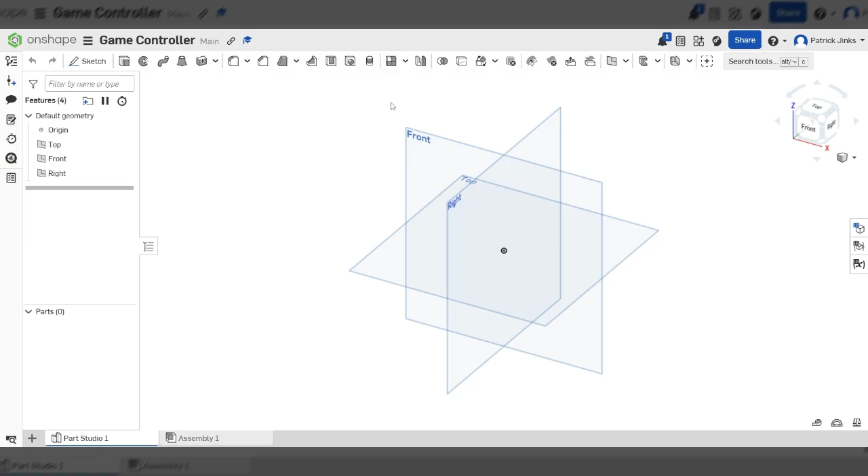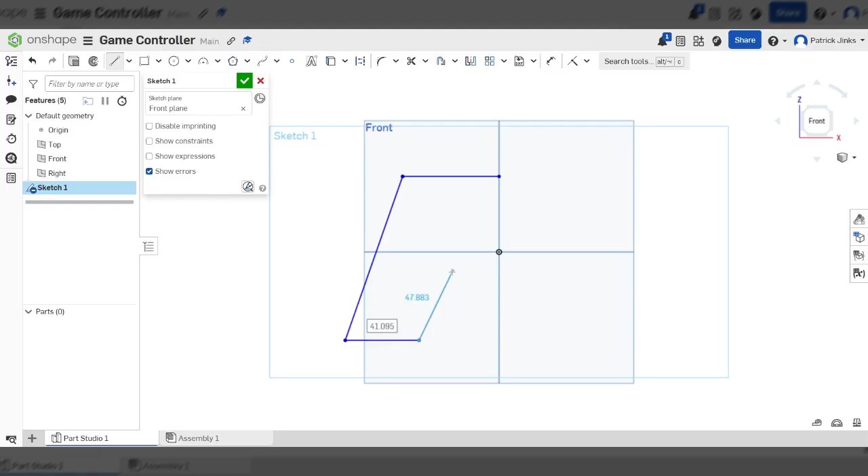First of all, I'm going to start a sketch on the front plane, and I'm going to draw half of my controller. You're probably going to want to spend a bit more time than me on doing this, but what I'm going to do is draw what I think is going to be a basic shape for my controller.

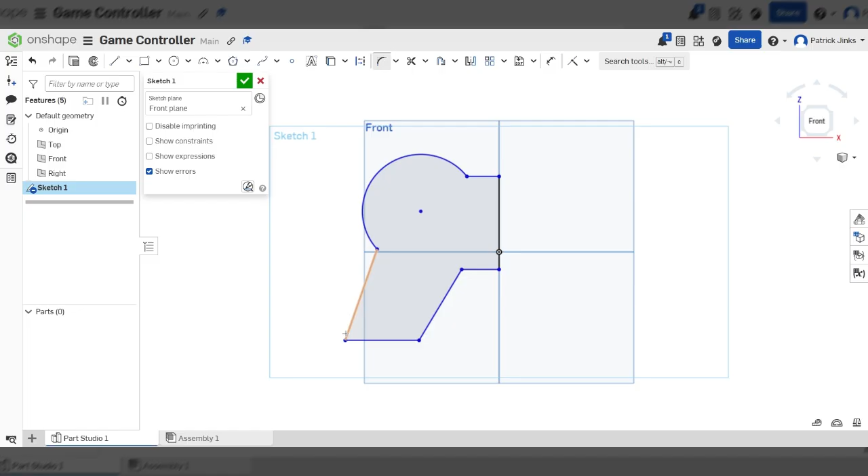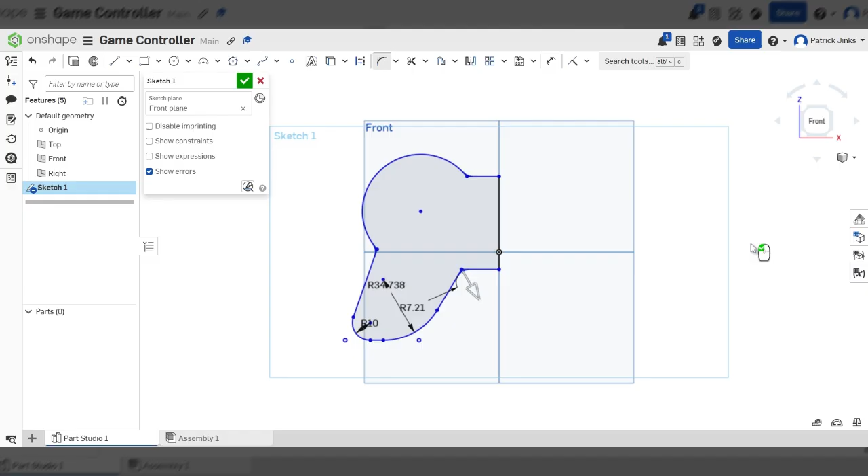I might put a slight round on there and trim the excess off, and then I'm going to fillet up each of these corners so it's all nice and round.

Then what I'm going to do is mirror this sketch. I'm going to click on my mirror tool here, click on my mirror line - there is a more in-depth video for sketching mirrors in the Onshape tutorial series. All I'm going to do now is click and drag around my shape, and I'm generally quite happy with that. I'm just going to trim that mirror line out. Yeah, I think that's all right.

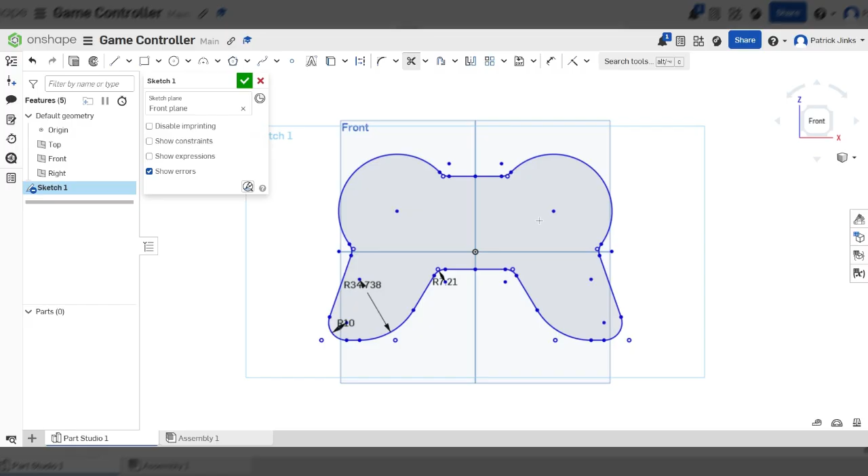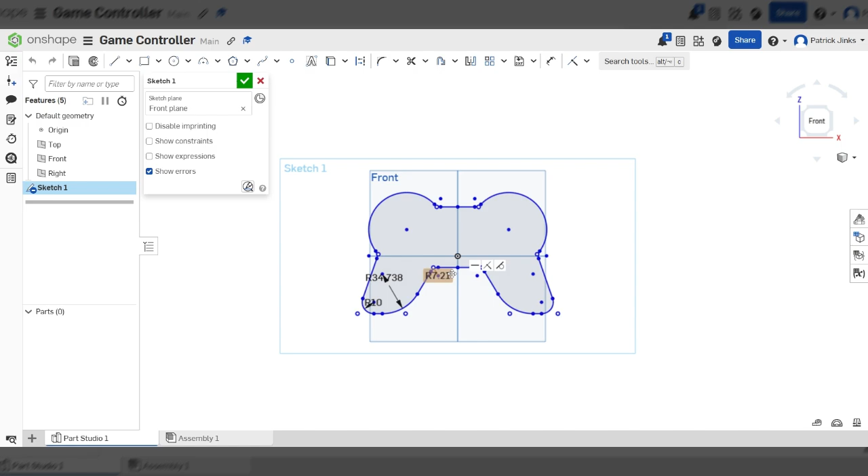What I'm going to do now is press extrude. If you're having trouble with the extrude, what you've done is not quite closed your shape. Like you can see with mine, these lines went all the way up to the mirror line. If you've got a gap, or if it's not quite a fully closed shape, if it's not grayed out, all you need to do is go around, zoom in, find the gap where you've not got a line connected, and then just use the line tool to join it up.

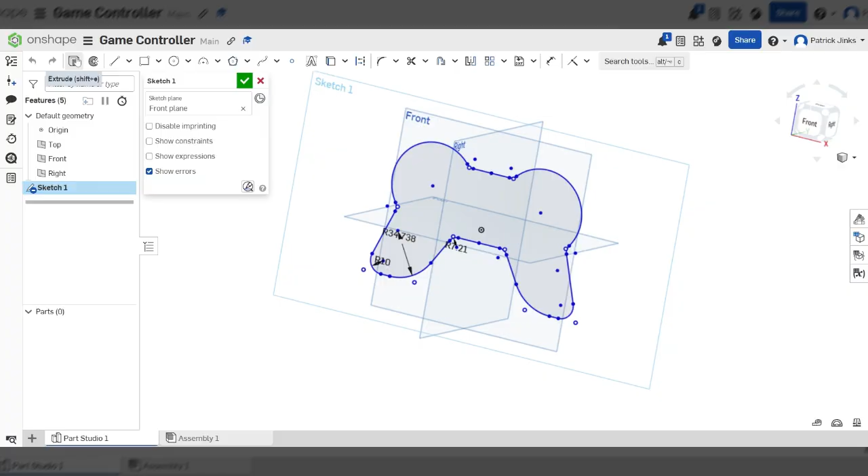Pause the video at any point if you're not following along or you're spending more time on this than me. But next, when you've got a shape you're happy with, I'm going to press extrude, and I'm going to extrude it symmetrically. I'm going to turn that on - actually, I'm not going to turn symmetric on. I think it'll be easier for me if I leave that.

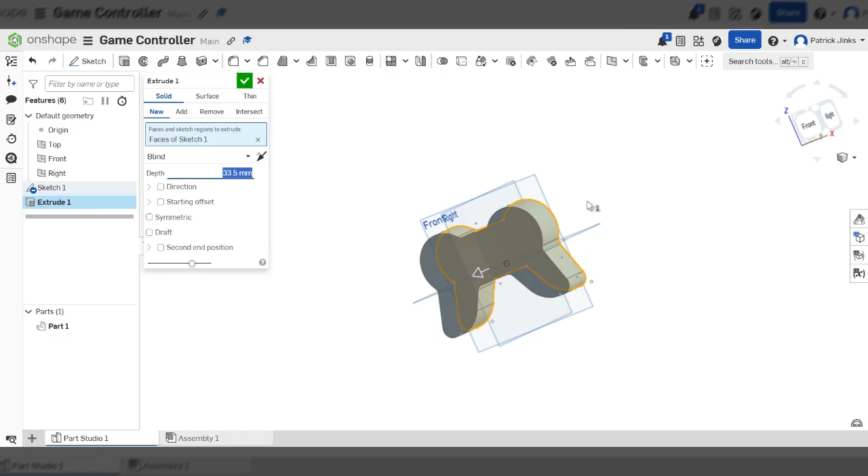And I'm going to make it a bit bigger than what I think is sensible - that's probably a sensible size once I've filleted all my edges, so that's about 33. I'm going to make mine 40, because we're going to be doing a bit of cutting away of this. So what I've got now is, well, technically a prism - I've made a 2D shape and just pulled it out, extruded it to be a 3D shape.

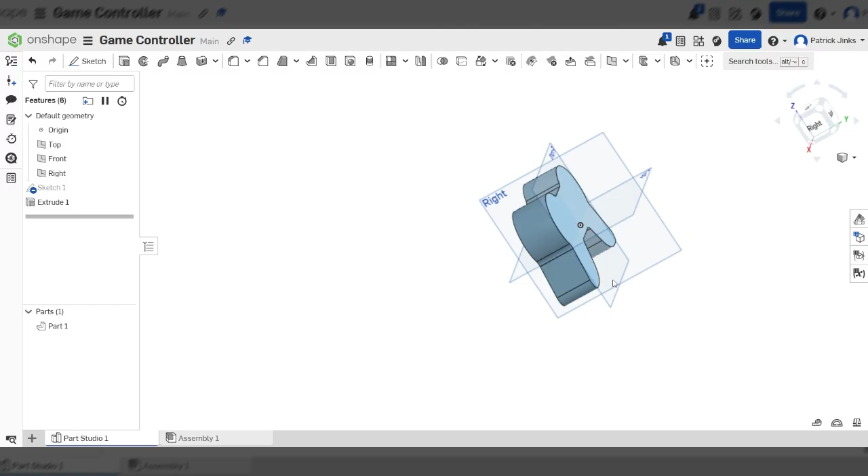Now what you're going to do is look at the right plane. Click on the right plane, press N, and now we're going to cut some of this profile away into what I like to describe as a sort of comma-like shape, so you've got that curvature, that curved profile on the front and back.

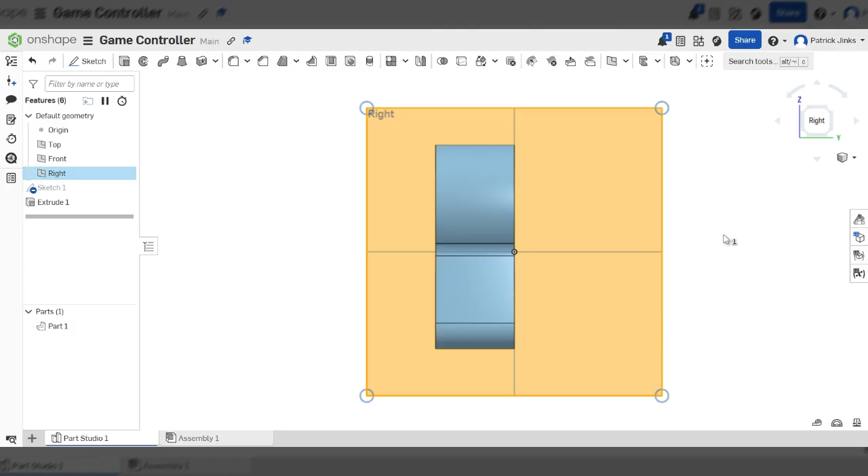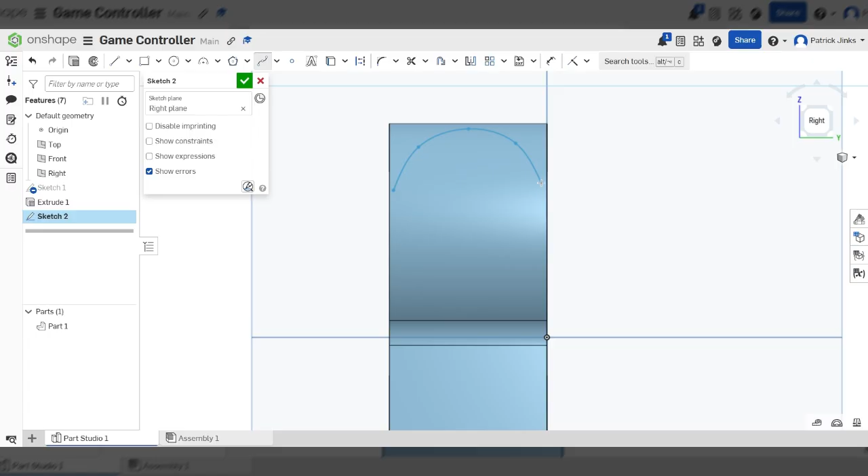So I'm going to do a sketch on my right plane, and use the spline tool. I'm probably going to want it nice and broad at the front, and I want to keep all my lines inside the shape - I don't want any to go out because that's going to look a bit weird when we finish this off. I'm just going to click round, being super careful, come in a little bit, and make this corner a little bit tighter than I did my top corner.

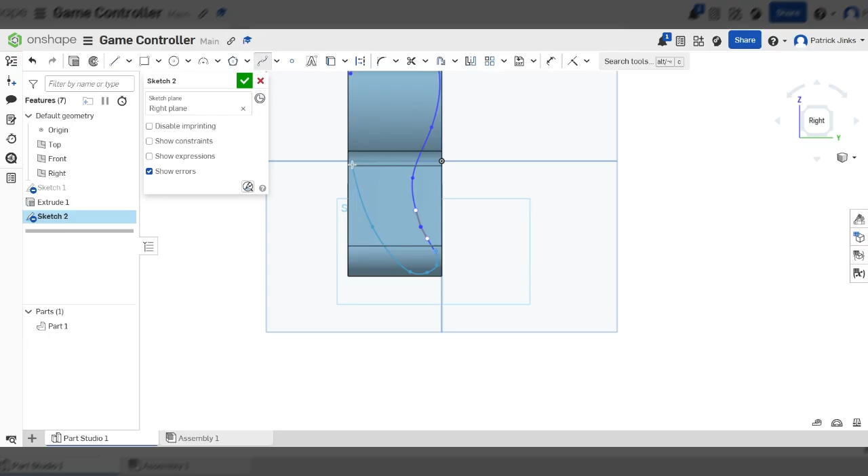You're going to do what you think's right, what you think looks right. Yeah, I'm kind of happy with that. What I've done is, oh, I've gone a bit rogue over here, so I'm just going to use my trim tool and go into it. Oh dear, that's not liked it, has it? I'm just going to try and fix that best I can.

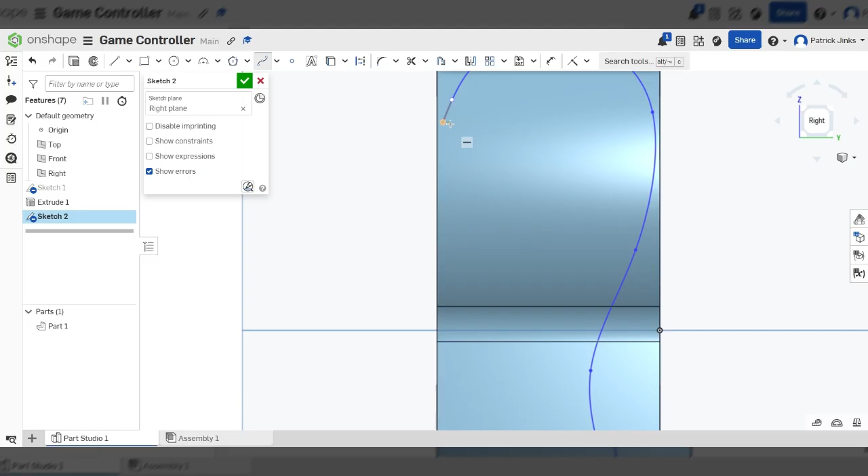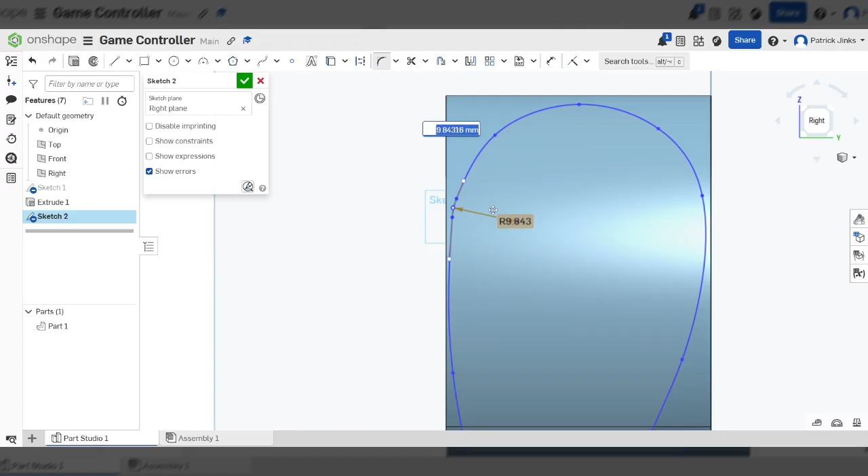In a moment, what I can even do is fillet off some of these rough edges. So where I've just become disconnected, this might happen, where I've got that corner not quite flowing. I can put a fillet in there just to make sure that's nice and neat. And over here, no one's going to notice that, but we'll do it for the sake of benefit anyway.

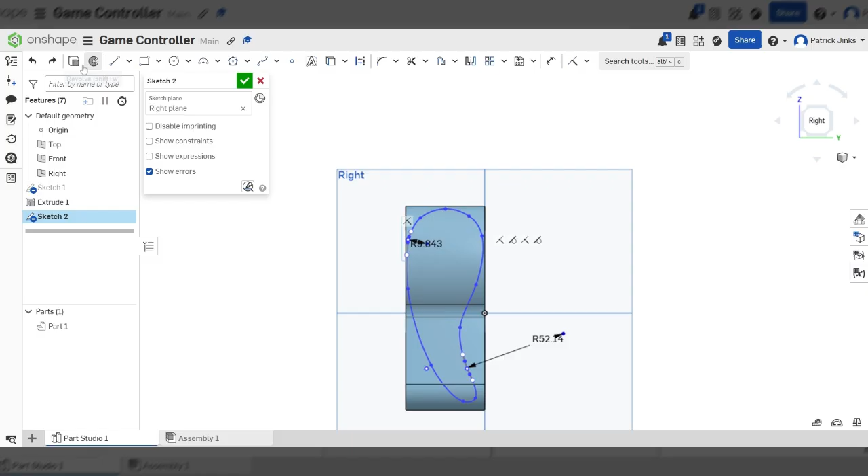Now we're going to do an extrude. The issue I've got, however, is let's turn that to 30. Oh dear, no we won't. The issue I've got is that if I try and extrude that, it's going to extrude everything in this line, and I am going to extrude it symmetrically, and I am going to remove it. It's cut out the wrong bit. It's left all the outside and left the inside.

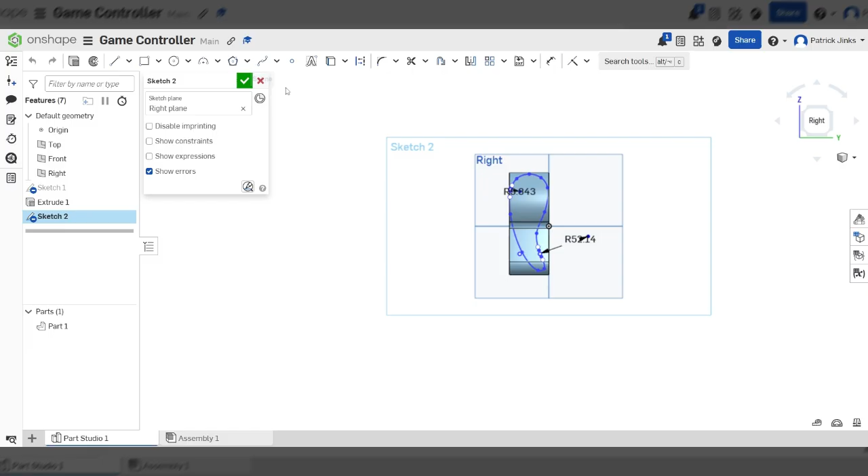So what I actually need to do is go back into the sketch. It's dead easy - all I need to do is draw a box all around the outside. There you go. And now what's actually selected is all the inside of this box has gone grey. Everything in the middle of the shape has been left a bit like a square donut with a weird hole in the middle. But we've got the outside selected. That's why we need to draw a bigger shape around the outside so we can select all this.

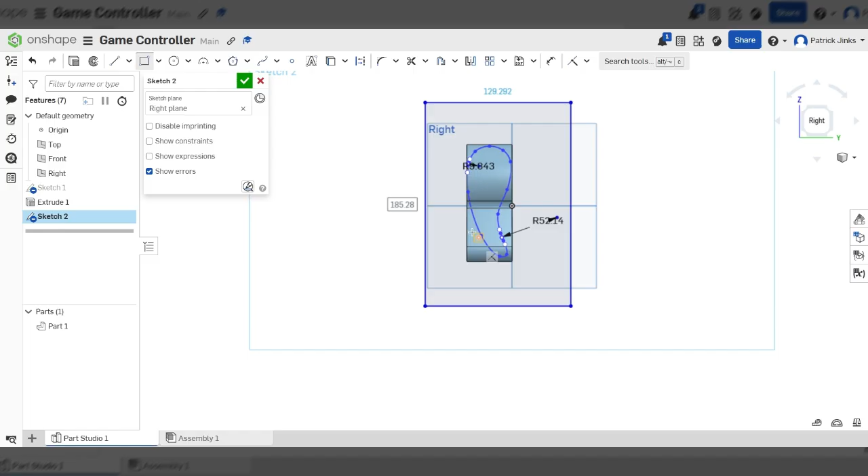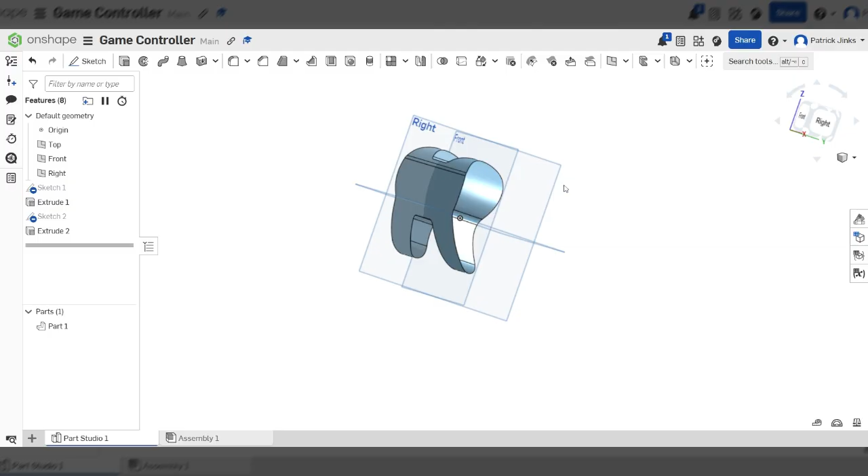And then I should be able to click extrude. And as you can see, it is the right bit that's extruding now. I'm going to click remove. I'm going to click symmetric, so it pulls out both ways. I'm going to click my tick. And now I've got a nice little profile for my shape of my controller.

The only thing I need to do now is go on the top plane and draw half a sketch. So let's have a look - again, only going to start here. And I'm probably going to use my arc tool.

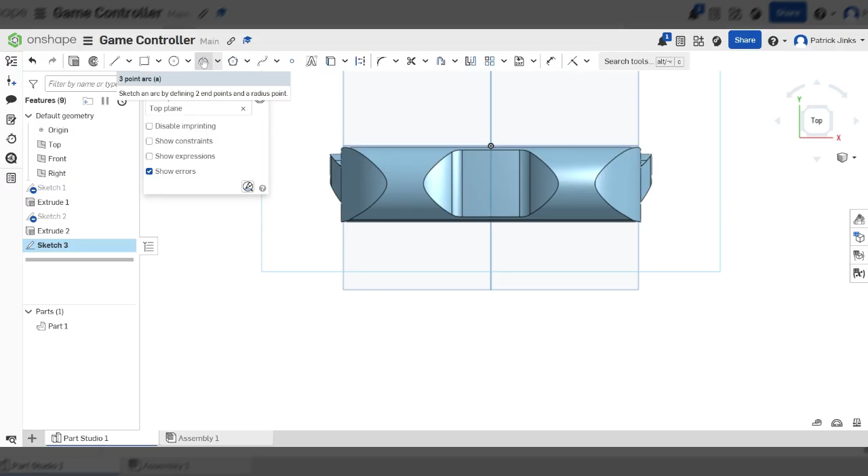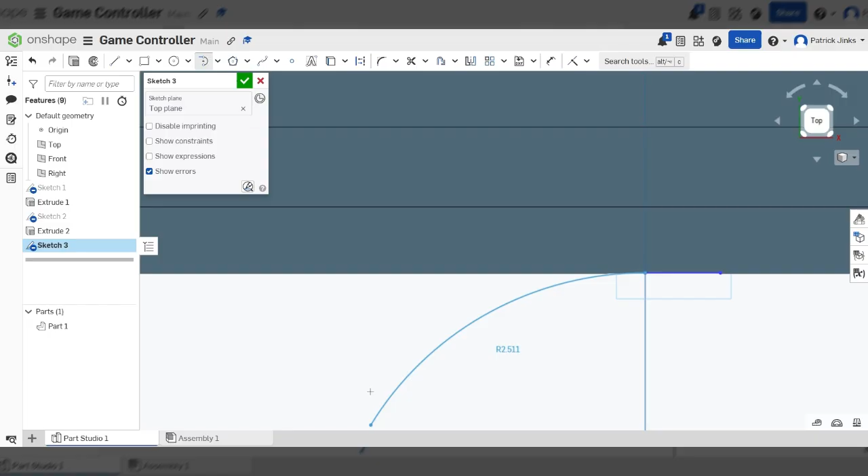In fact, if you want to do this the proper way, what you're going to do is right on the edge here - zoom in as far to the edge as you can go. You're going to draw just a straight line and then press escape. What we can do now is in the arc drop down, which defaults to 3-point arc, you've got something called tangent arc. And what that does is if you click at the end of a line, this arc is going to begin being a continuation of that line and it's going to flex.

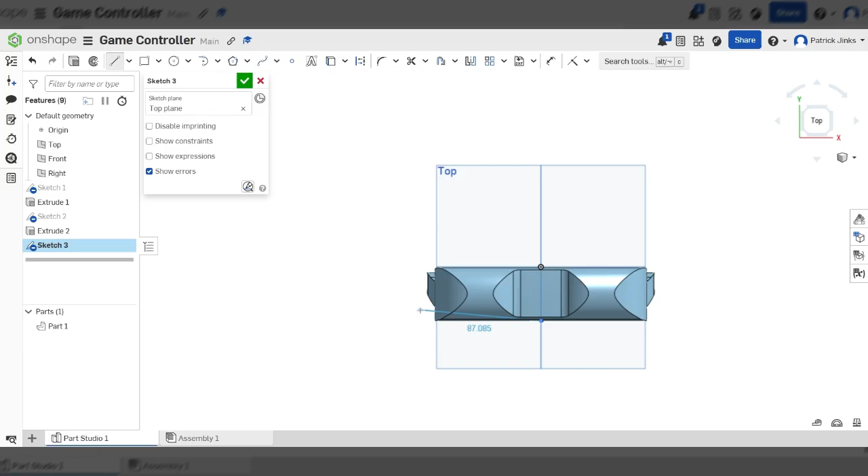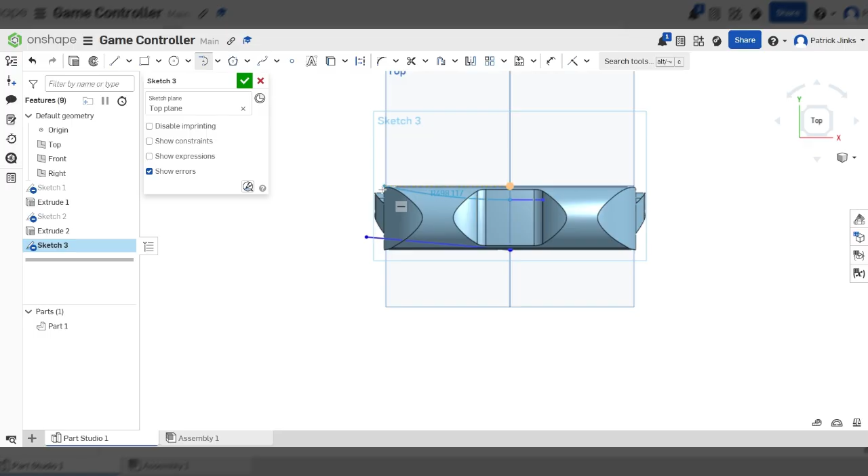This is really important because when we mirror this, we want it to be absolutely horizontal so we don't get any unwanted creases in our design. So I'm going to do quite a gentle curve on the front, and a bit of a steeper curve on the back. I'm going to draw it into about there, I reckon. I'm going to draw my horizontal line out, click my tangent arc, and it's going a little bit steeper. And then it doesn't matter how, but you're going to join these two lines up.

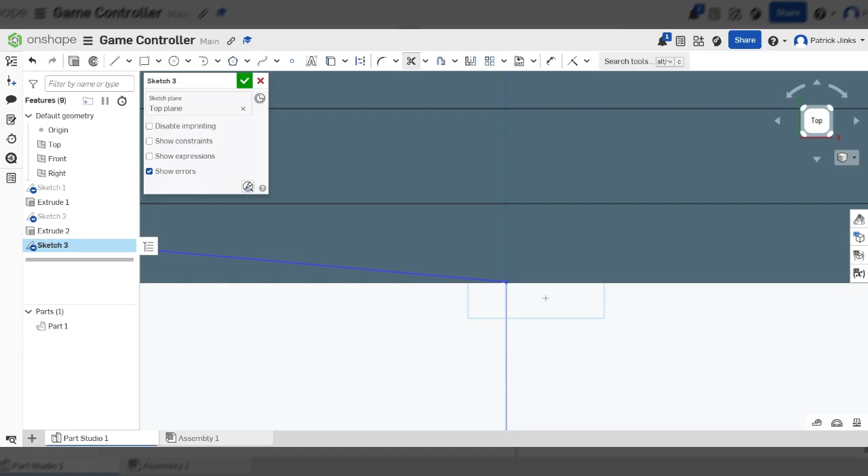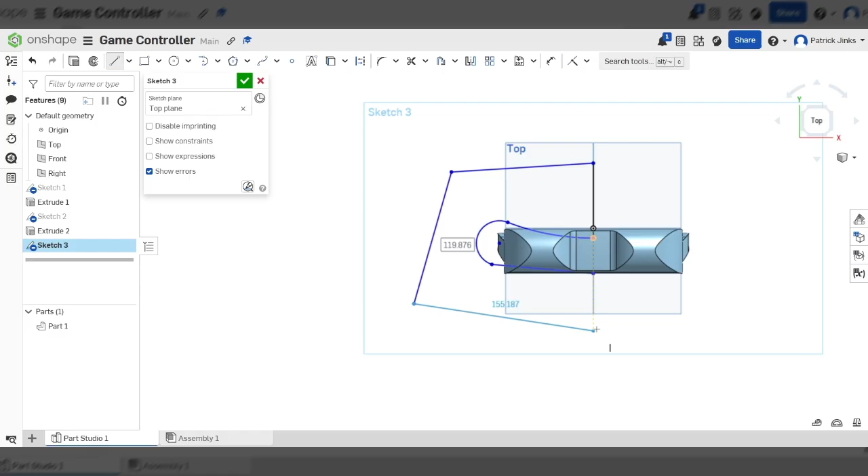Trim these two initial lines that we started with, or you might need to zoom all the way in. And then you're going to close the shape off by drawing a vertical line to there. Last thing - actually, you're not going to draw that vertical line there. What you're going to do instead is draw a line straight up and bring it round, just so we've got highlighted again everything that's not in our design, everything we want to get rid of, which is just actually this section here and this section here.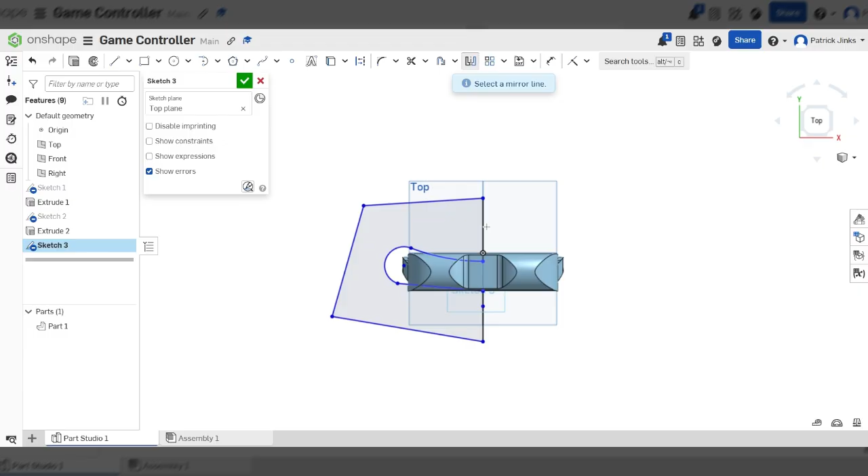What I'm going to do once I've done that to one side, because I do want it perfect and symmetrical, is I'm going to mirror it. So mirror tool, select my mirror line, which should be the front plane, or is it the right plane - highlight everything. I don't think it matters, but I'm just going to trim these off so I've got one solid shape here, and I'm going to remove that symmetrically so it goes up and down.

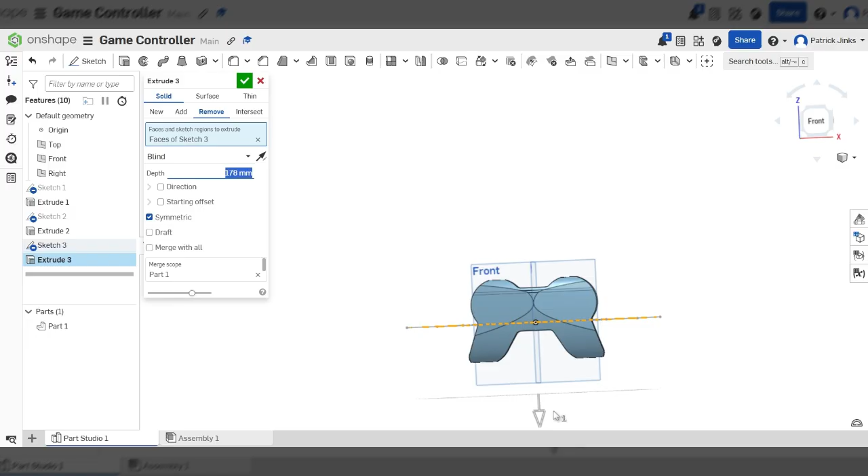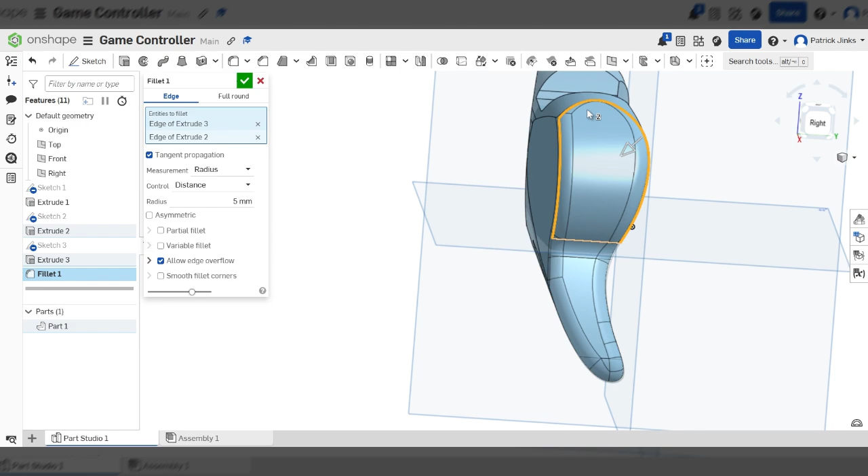Now I've got the basis of a shape for my controller. If you want, you can go around and fillet some of these lines, especially the edge lines. I will warn you, this can get really tight and really tricky. So just have a play about with it, see how far you can get the fillets to go.

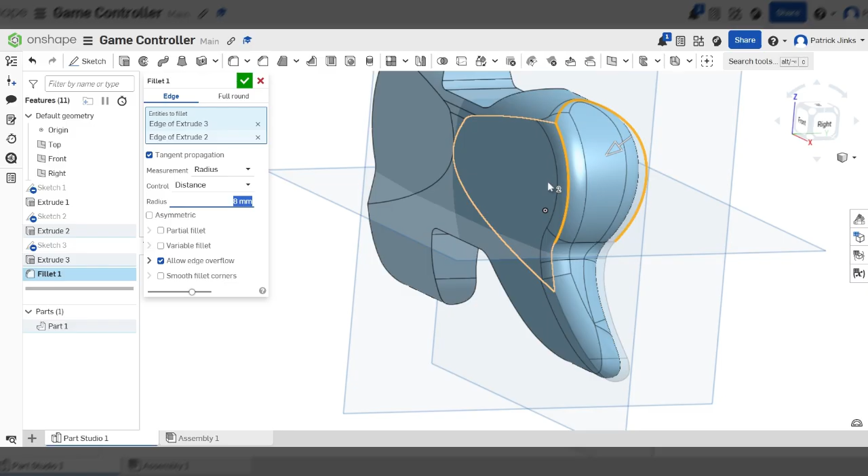Mine are broken on 12, I'm going to go down to 10. Still 10's broke. I'm going to go to 8, that works - let's try 9. We'll stick with 8. So I'm going to do that on both sides. Remember, everything should be symmetrical here. Apparently I'm not going to do that on both sides - I'm going to do it on one side, and I'm going to try and do it individually on the other side.

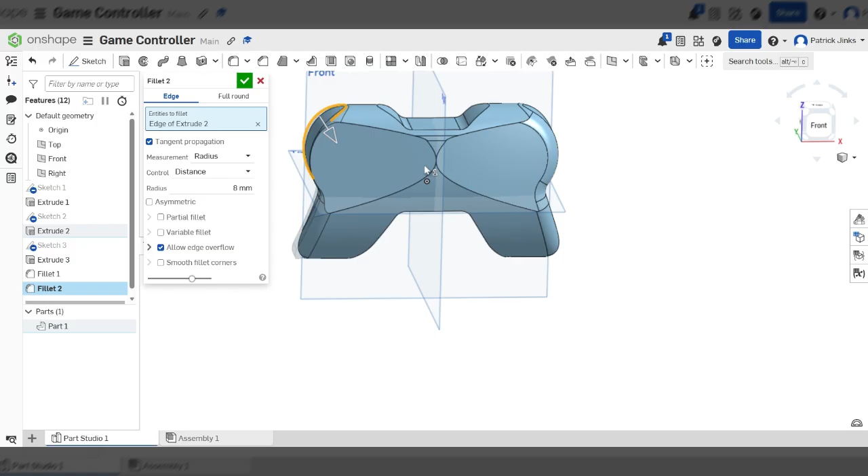Right, there we go - that should be exactly the same. Sometimes it just doesn't want to do it in the same fillet. And what I've got there is the base of a games controller.

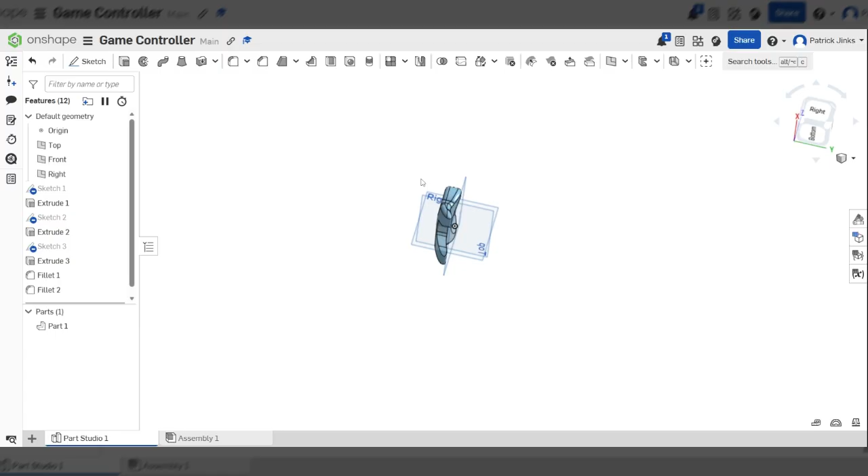What we're going to do in the next sessions is put buttons on it. We're going to make sure they're nice and flush to the screen. We're going to put a split line down it, and we're going to do something with the interior - we're going to shell it, make it hollow, and put some ribs and brackets in, and eventually, hopefully, it's going to look like the real thing. So I'll see you in the next video.